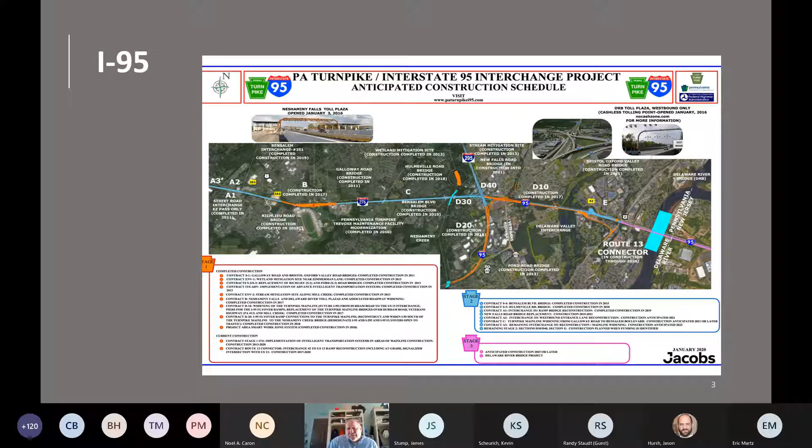So that was a big chunk, and the Delaware River Bridge is the next real big thing going on, at least to get started in design.

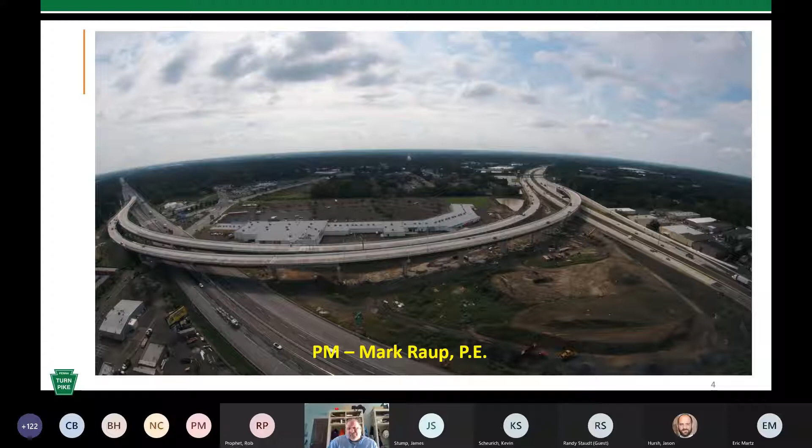The Lafayette Street interchange at milepost 331 is part of the Montgomery County Lafayette Street Improvement Project, to get from Norristown out to the Turnpike, and to help revitalize Norristown with an access point there. One of the early things that has to happen before we can build our interchange is for Montgomery County to replace the Ridge Pike Bridge over the Turnpike prior to us going to construction, to allow for ramps to fit underneath it. Our project manager for the PTC is Mohammad Mohammad, and the prime designer is KCI.

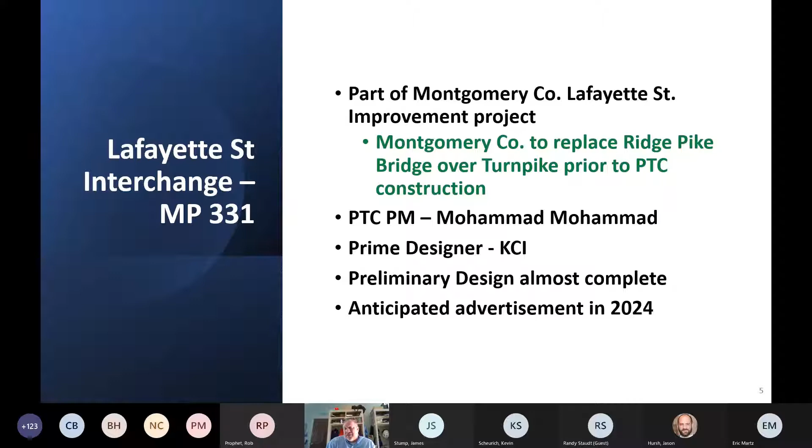The preliminary design for that project is almost complete, with an anticipated advertisement somewhere in 2024 if things go well. The Ridge Pike project actually had a public meeting last night, so they're getting moving into their final designs. Hopefully they'll be out about a year ahead of us, and we're hoping to have our public meeting later this year.

Another interchange project is Scranton Beltway, on the northeast extension up in and around Scranton, where we're going to have 2 connections to Interstate 81 off of the northeast extension. One will be the Wyoming Valley interchange at the bottom of the graphic shown, just before you get up by the airport in Scranton. The roads are parallel to the point where they're maybe 100 feet apart, and we're going to have a connection there, and then a direct connection up at the very end of the northeast extension at Clarks Summit and Interstate 81, where again the roads tie into each other.

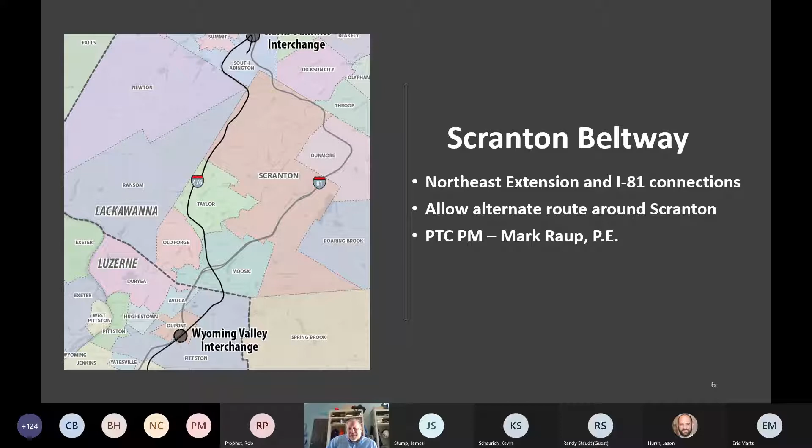There'll be a direct connection, and the hope is when there's any congestion on 81 or even on the northeast extension, there'll be a quick alternate route to go around Scranton to keep you out of the congestion. The PM for that is Mark Raup, and this is going to get picked up here in the next month or two.

Probably the bigger question is, what is a special project? These are our expansions, the big chunks: the Southern Beltway, out around Pittsburgh from the airport that's supposed to end up at the Mon-Fayette Expressway, and then the Mon-Fayette Expressway itself, which ultimately will go from Morgantown, West Virginia, up to I-376 near Monroeville. If any of you are familiar with the Pittsburgh area, it'll be right near the...

I just lost my train of thought there, sorry. It's just north of where the mall is in Monroeville, but it'll tie into the I-376 expressway up there.

So there are also other projects that don't fit neatly into other categories. The Turnpike fiber project, where we're installing fiber along the Turnpike for our use and for possible commercialization, is one of our big projects in that group.

Neil Raup, who has retired from the commission but is still in an advisory role, and Wally Weimer are heading it up through design, and Steve Dale's been involved with that as well for the commission.

Another big project is our all-electronic tolling, which is being handled by Don Steele, who I'm sure many of you know as well. It's a pretty big undertaking, especially now that we're in an all-electronic environment.

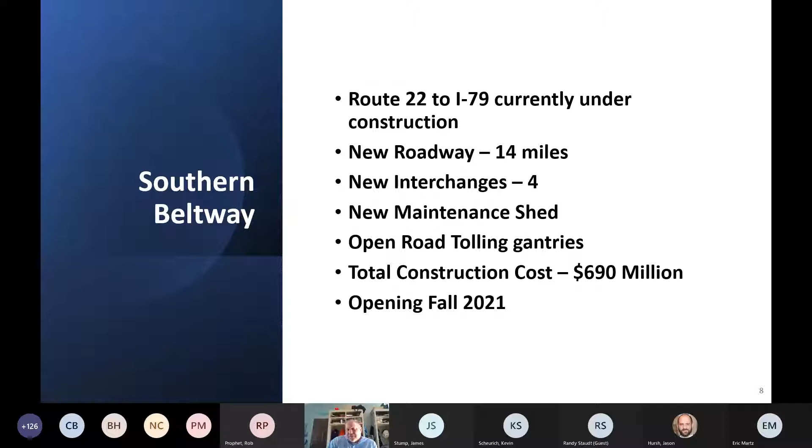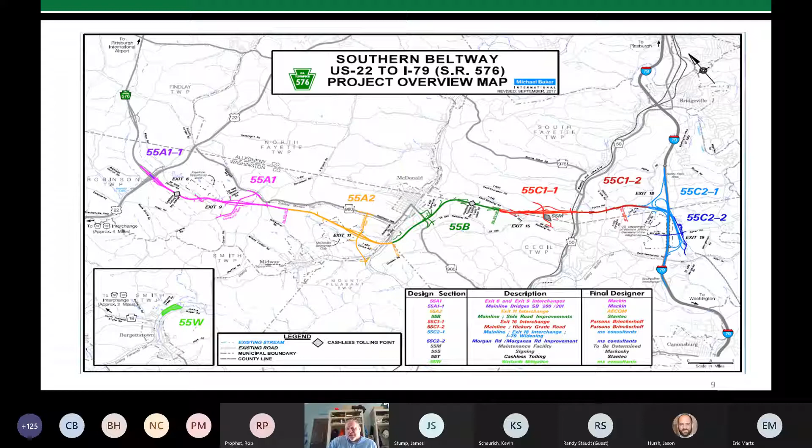This is the overview map. The Route 22 interchange is to the far left of the screen, where it says 55A1. We move along through the tolling gantries, an interchange with Beach Hollow Road, and then an interchange with Fort Cherry Connector, which is a new connector road we built. Another tolling gantry is just east of the Borough of McDonald, and then an interchange with Route 50, which entailed a connector road as well. Our maintenance shed is going to be in this vicinity too, and then the full interchange with I-79. So I'll get into the photos, which are the fun part to look at.

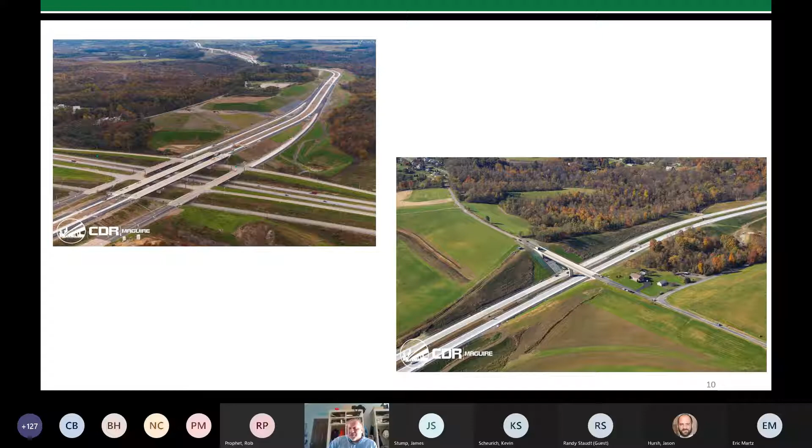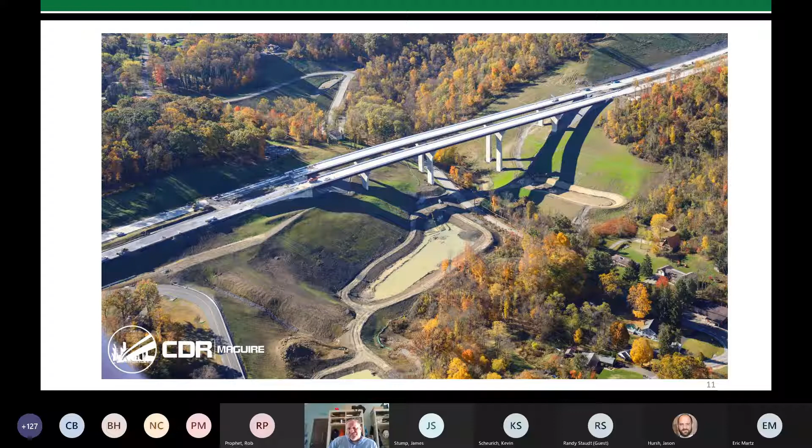The next section is 55C1-1. It's a local road where there's now a bridge over an expressway, where there was no need for a bridge before. This photo is of our bridge over Route 980, about 100 feet in the air. This is SR 980, running from the top left to bottom right. Pretty impressive structure to see from the ground, let alone from the air.

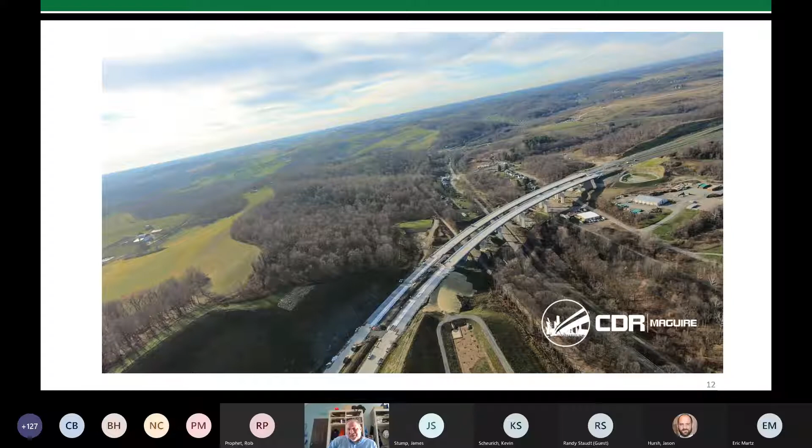The next one is our 55A1 project, with this curved girder bridge across Johns Avenue, Noblestown Road, and then two trails and a railroad. There are six sets of piers. It's a pretty impressive structure to be built and to see being built.

And then this is the interchange with Interstate 79. As you can see, the interstate runs from the bottom left towards the top right of the screen, and the Southern Beltway is to the upper left part of the screen. Coming to the right, this is where the grading is going on.

Where we go under I-79, we actually had to basically punch a hole underneath it and then construct the bridges. So we shifted traffic, excavated, built the new bridge, and moved traffic to where it is now. You see in this picture, and then finished cutting the hole through there so they could do all the fine grading for the expressway.

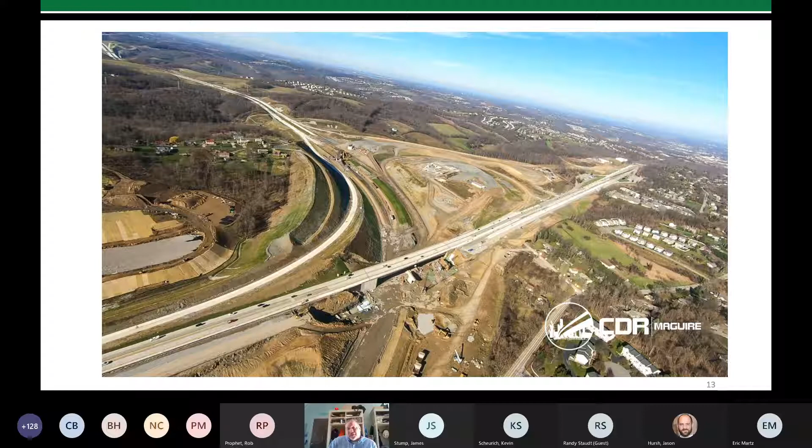The last photo is looking from the south to the north towards that same interchange. You can see where it loops around to the left-hand side of the screen, rough graded to head north on I-79, with the northbound I-79 exit coming to the left of the screen as well. In the upper right again is the bridge over I-79 that we just had a close look at. It's a pretty impressive project.

It's really something to see it come along, especially during construction.

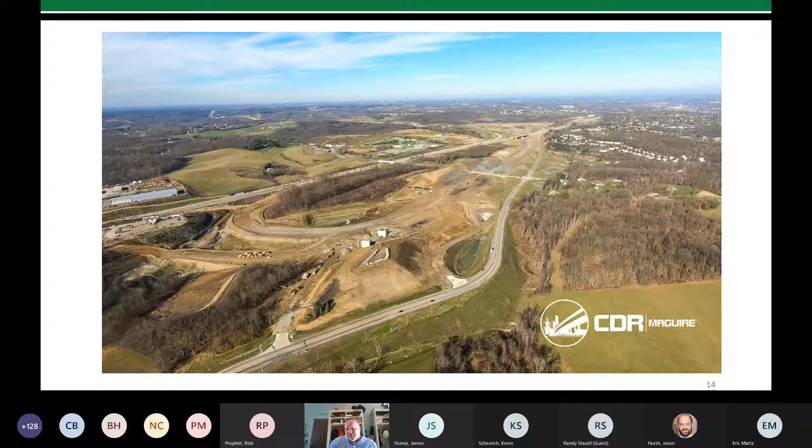The other big expansion project we have going on is the Mon-Fayette Expressway project. Currently we're in design from Route 51 to Duquesne. The Route 51 exit is in Jefferson Hills, where the expressway currently ends. The intent is to end up in Monroeville, but for now the funding gets us up through the city of Duquesne, basically to the Mon River.

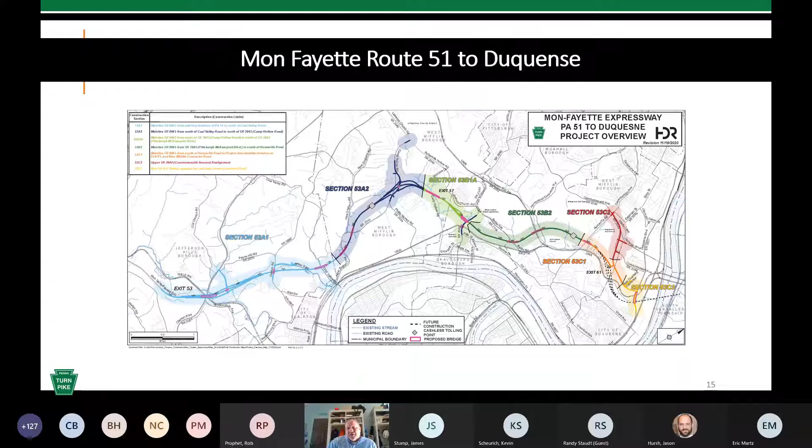The first advertisement is slated for spring of 2022. This is an 8-mile stretch of construction. We'll finish the full interchange at Route 51, build a new full interchange in Dravosburg, and a partial interchange in Duquesne. The one in Duquesne will eventually be a full interchange when the expressway gets completed to the north, but for now there's no reason to build the ramps coming from the south and to the north, because there's nowhere to go to or come from.

So the total construction cost right now is estimated at $905 million.

So these expansion projects basically come from what's called the independently funded program, rather than our capital plan. Act 61 of 1985 designated the projects that were going to be built out of this independently funded program, and the funding comes from oil franchise tax, and it funds both Mon-Fayette and Southern Beltway.

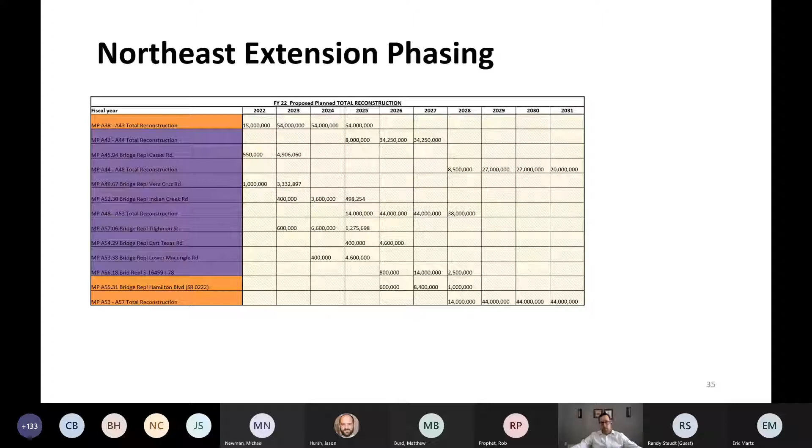The last slide I'd like to present is that we are looking to move the milepost 324 to 326 project into construction, pending that we have funding available. We're moving that and the Hawk Falls Bridge forward right now, which Jim Stump will talk about later. The idea is that we're getting really good bids right now. There's not a whole lot out in construction, and we feel like we have the ability to do one or both of those projects, and if we don't do them now, who knows when we will.

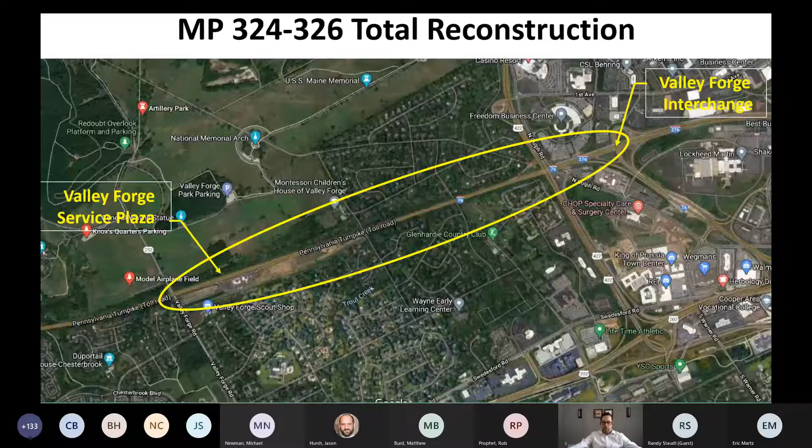So I am Charles Buchanan. I am the roadway engineering manager.

Just a quick rundown of what the roadway unit does inside engineering design. We monitor the overall system-wide pavement condition to maintain a high-quality ride surface for all the paying Turnpike customers. We're responsible for the timely development of all resurfacing programs, pavement rehab projects, routine repair, and miscellaneous highway design, anything that addresses customer safety and minimizes customer impacts, and we follow all current design standards, or ensure that other units are following them.

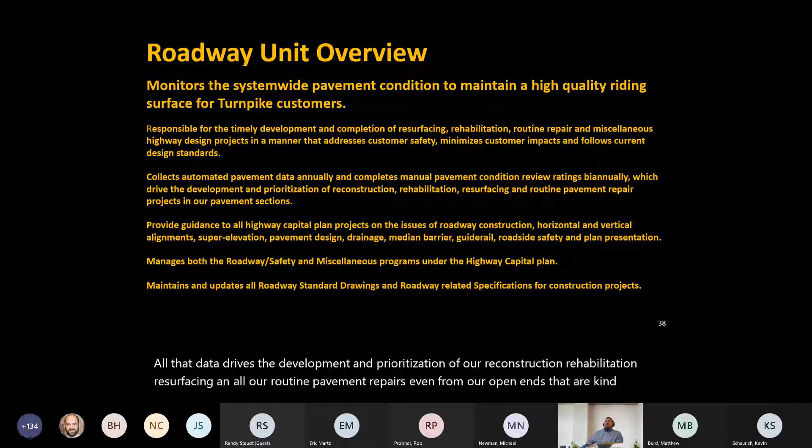We also collect automated data annually and complete pavement condition reviews on a biannual basis. My staff runs the system twice a year and does manual pavement inspections that way. All that data drives the development and prioritization of our reconstruction, rehabilitation, resurfacing, and routine pavement repairs, even from our open ends, which are tweener construction contracts between what our maintenance department can handle and what our resurfacing projects plan to do.

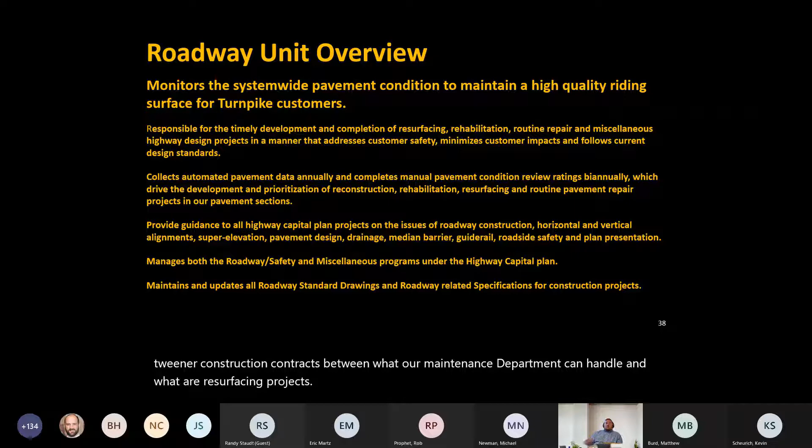We provide guidance to all the other projects on the highway capital plan concerning roadway construction, horizontal and vertical alignment, super elevation, pavement design, drainage, barrier, guide rail, and overall roadway safety.

Plan presentation is also under our purview. We manage both the roadway safety program, which covers resurfacing, barrier, and guide rail projects, and we oversee the miscellaneous program. So if something doesn't neatly fall within roadway safety, bridge, or total reconstruction, it gets lumped into what we term the miscellaneous program. That includes geotechnical, stormwater MS4, environmental monitoring, and traffic engineering.

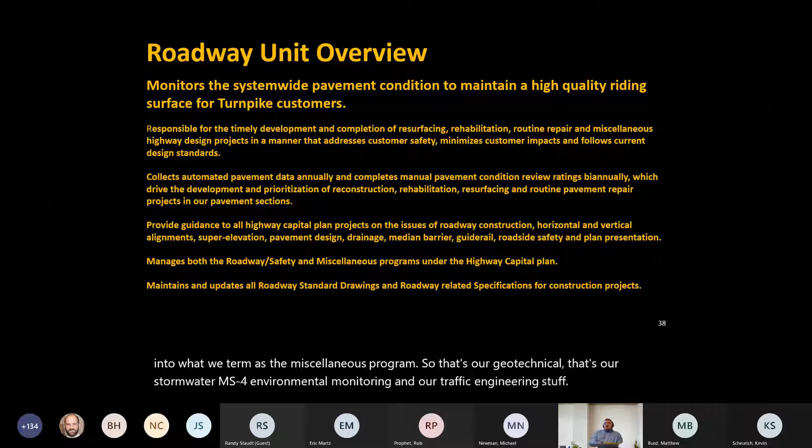Roadway also maintains and updates all the PTS 100 roadway standard drawings and all the roadway-related special provisions and specs for our projects.

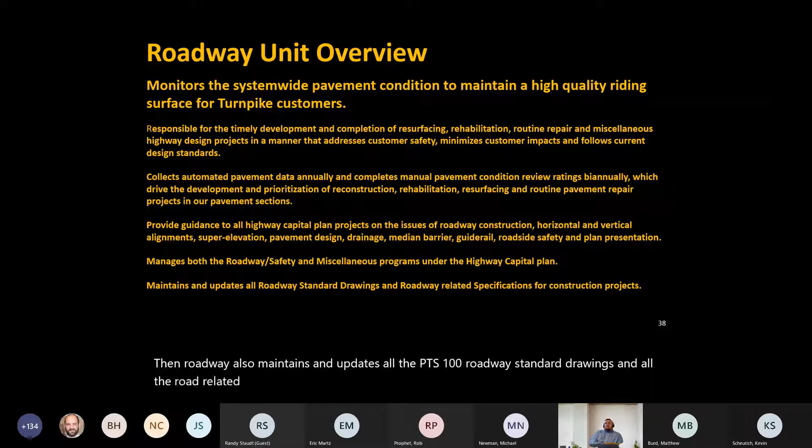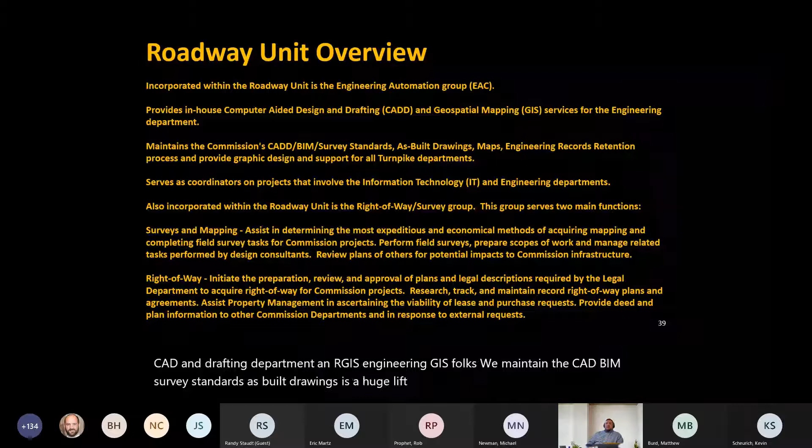Incorporated inside Roadway is also the engineering automation group, our in-house CAD and drafting department and engineering GIS folks. We maintain CAD, BIM, and survey standards - as-built drawings is a huge lift for us - all the mapping, our records retention process, and we also provide graphic design and support for other Turnpike departments. That unit also serves as the bridge between our IT department and engineering.

Recently, our right-of-way survey group was transitioned to our roadway unit. So they really have two primary functions right now: surveys and mapping. They assist in determining all the ways to acquire mapping for projects, be it aerial mapping, LiDAR mapping, mobile LiDAR, or conventional field survey.

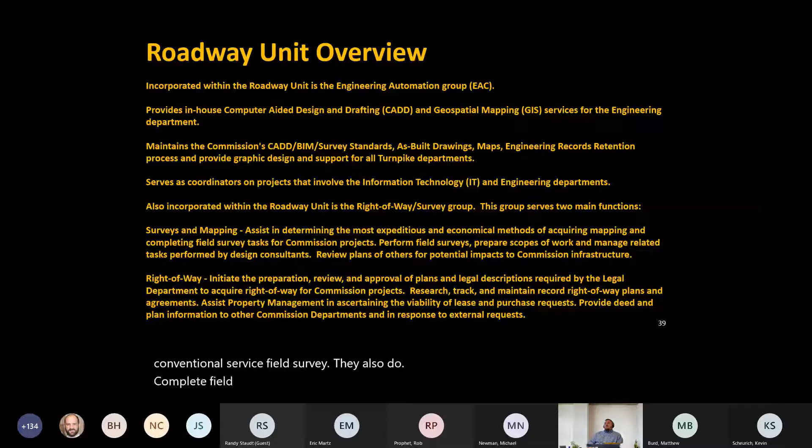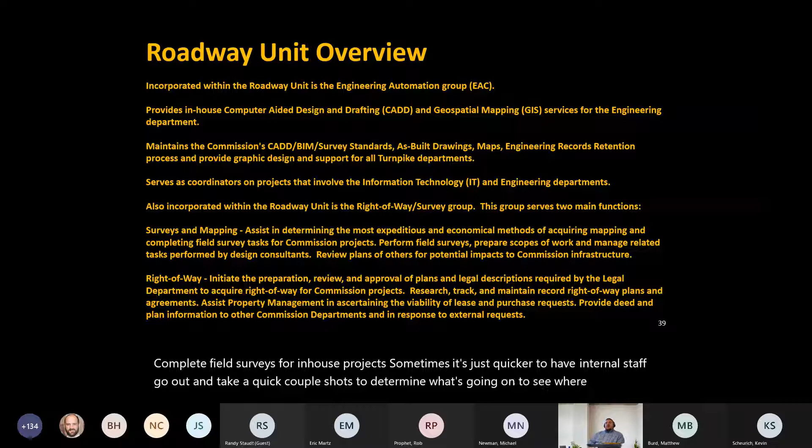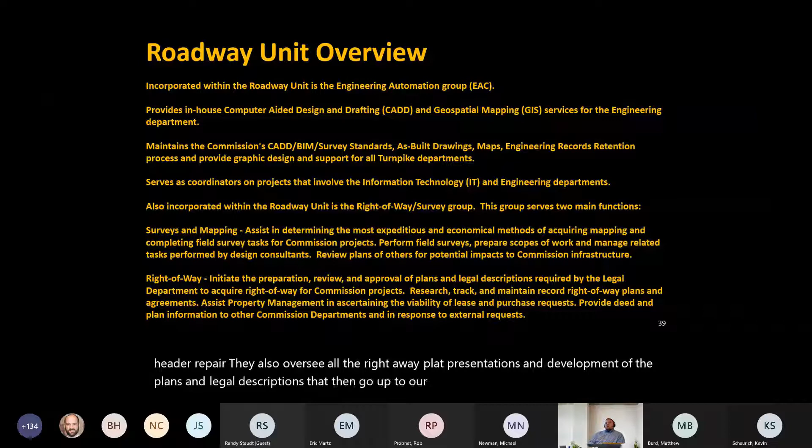They also complete field surveys for in-house projects - sometimes it's just quicker to have internal staff go out and take a couple quick shots to determine what's going on and see where we need to head a repair. They also oversee all the right-of-way plat presentations and development of the plans and legal descriptions that then go up to our legal department to actually acquire that right-of-way for our construction projects.

Probably the two big things that happened in 2020 in Roadway were two subunit reorganizations. Our roadway unit's stormwater management and MS4 program were transitioned from roadway to the environmental planning unit as a better fit, since MS4 is more of an environmental issue now than just standard stormwater management pond design that a lot of us grew up with. And right-of-way survey was transitioned into the roadway unit also.

I just wanted to cover real quick, request for commission information - this is for requesting right-of-way or as-built drawings. Usually the easiest way to get these is to go through a Right-to-Know request. On the Turnpike's main website, if you go all the way to the very bottom, there is a Right-to-Know link.

You heard a lot about funding already, but I deal with a lot of funding versus life cycle issues.

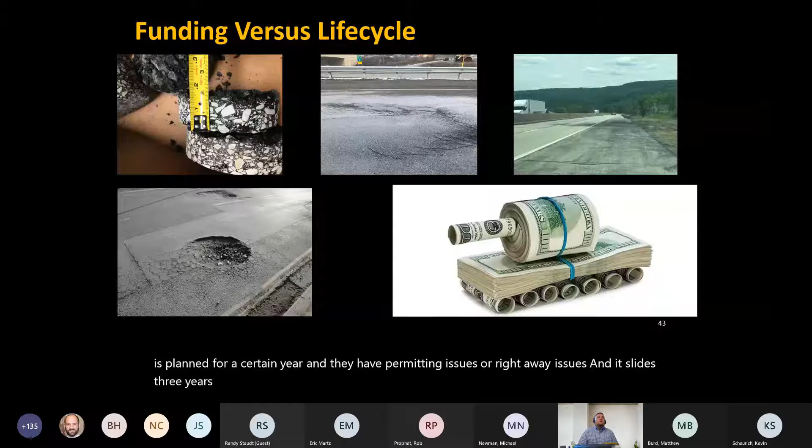Roadway is usually the one that has to flex a little more. If a reconstruction is planned for a certain year and they have permitting issues or right-of-way issues and it slides 3 years, we still got to get in there and maintain that road. So we have to be very flexible with our overall program.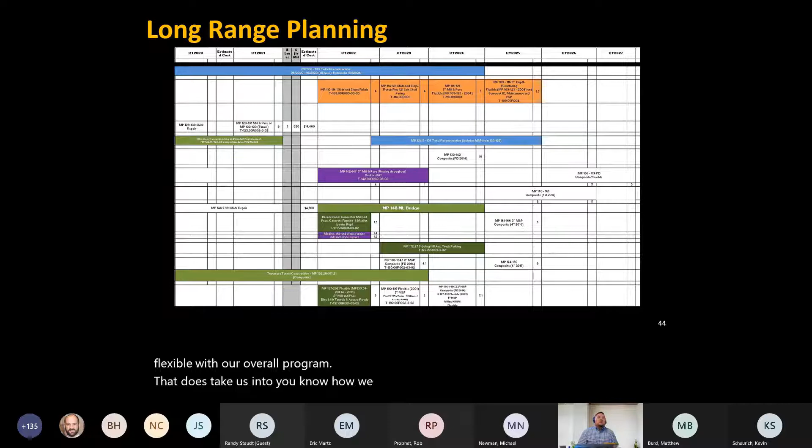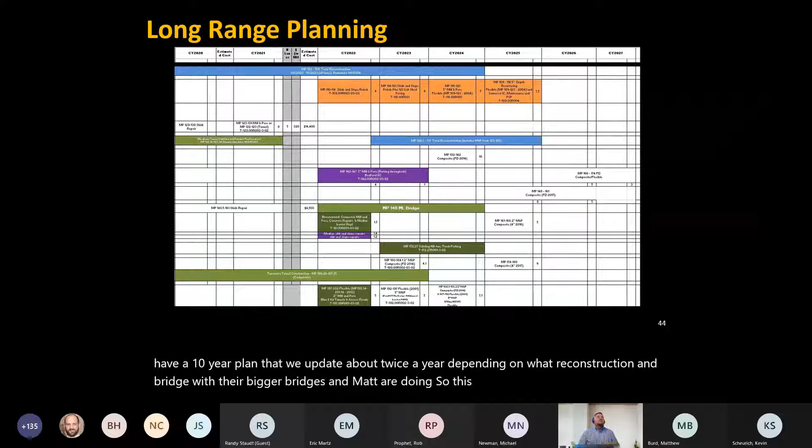That takes us into how we run our long-range planning out of roadway. We have a 10-year plan that we update about twice a year, depending on what reconstruction and bridge with their bigger bridges and Matt are doing. So this is just a snapshot of our District 2. This takes us out through 2027 on this view.

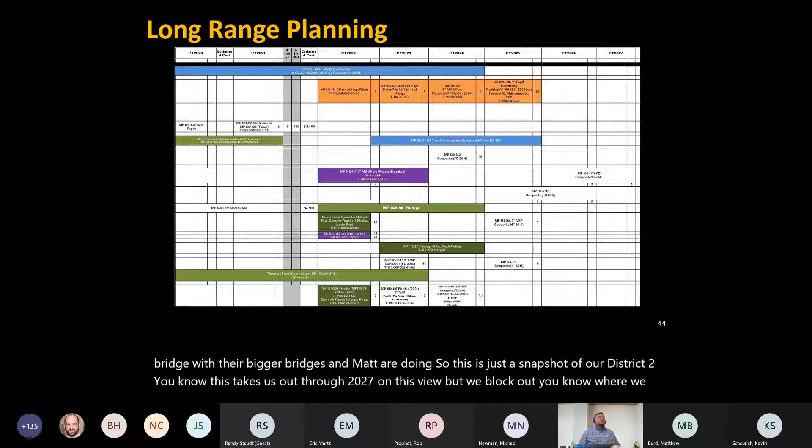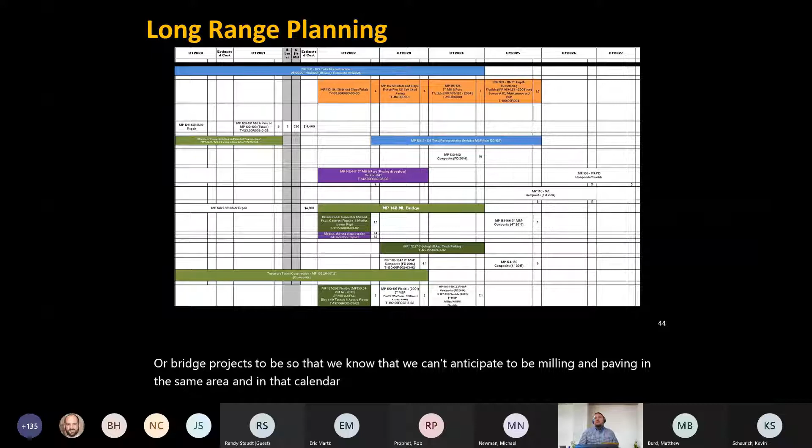But we block out where we are anticipating total reconstructions to be or bridge projects to be, so that we know we can't anticipate to be milling and paving in the same area in that calendar year. So we have to start making the decisions: do we mill and pave an area early, or do we try to patch it and push it for a year or two and come in after a project?

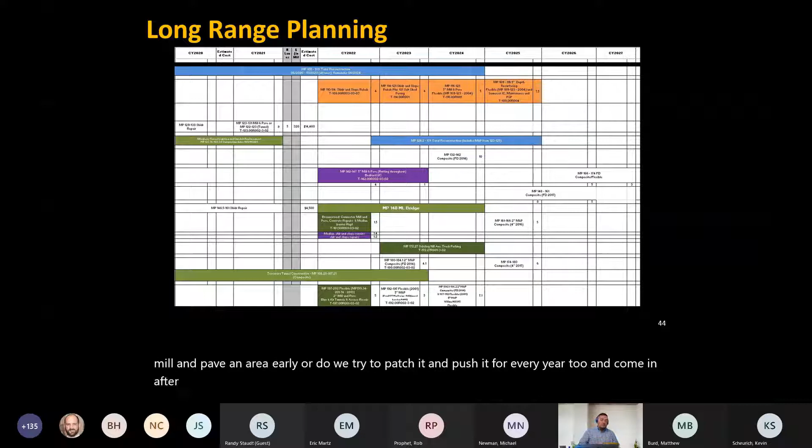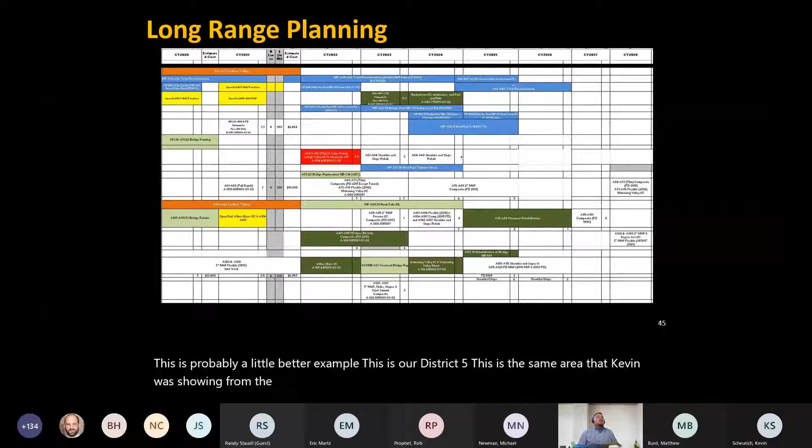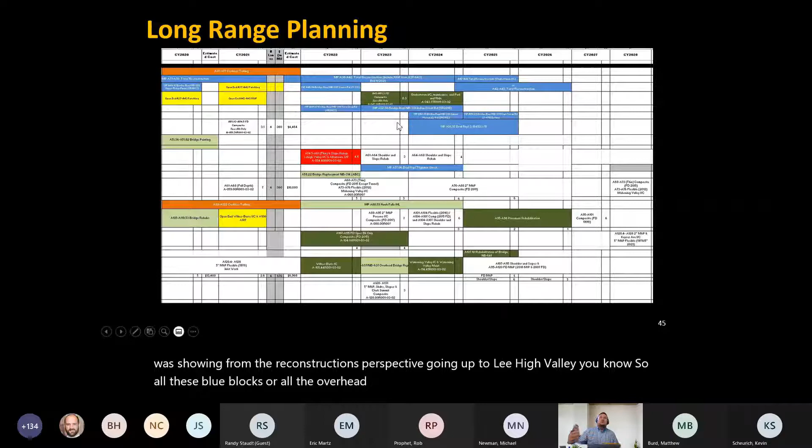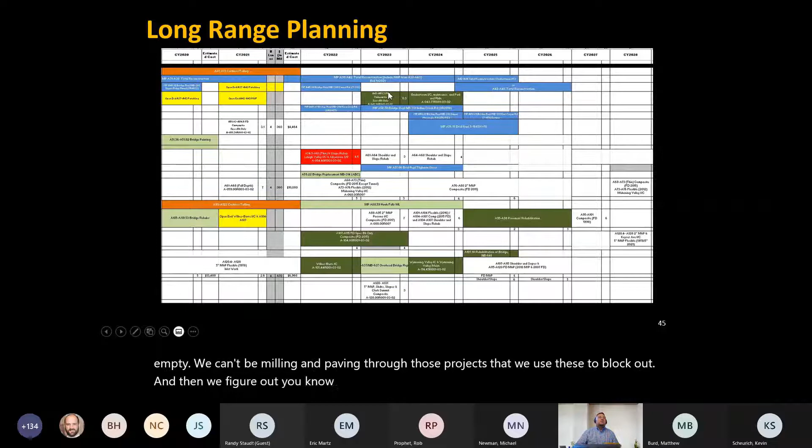This is probably a little better example. This is our District 5, the same area that Kevin was showing from the reconstructions perspective, going up to Lehigh Valley. So all these blue blocks are all the overhead bridges that, when they have mainline MPT, we can't be milling and paving through those projects. So we use these to block out, and then we figure out how we can chop up our mainline sections in order to maintain the highway for our customers.

I do want to touch base a little bit on digital delivery and where the Turnpike is heading. Right now, to date, we've created our master line and master right-of-way files. We're working on our linear referencing system, so the difference between a mile post on a plan sheet versus a mile marker that is in the field, whether they're actually at the same station or 50 feet apart, 100 feet apart, for correlation.

We're doing LiDAR scans and creating our master pavement data files for AgileAssets. We've started to develop corridor and drainage models for our digital delivery. We've started to create our BIM technology standards, and we will be in a position to roll out compliance checking in a very short amount of time. And we are researching and going through our workflow of basically the file management system.

Digital delivery between now and 2023 — we've kind of set the benchmark at 2023 to be at the point where we can issue digital delivery. We're going to continue to develop our corridor and drainage models, move into the full integration of our file management system, and develop the ways to review digital models. If we're not getting plan sheets to do a 75% review, how are we going to review plans moving forward?

All right, thank you, Charles. Appreciate that. Obviously, you can tell that they did save the best for last. And equally obviously, you can see that there's not much time left.

So I guess, Eric, whenever you want me to stop for questions, just let me know. It'll be like the Oscars, you can start to sing or something, and I'll stop talking. We don't have any time constraints, Jim, so please continue.

Great, okay. I'm Jim Stump. I am the bridge engineering manager here at the Turnpike. I've been here for almost 29 years, all in the bridge department.

Just a little bit about the bridge department. We are currently down to just 8 folks. The department is split into two divisions. One side is design, and we do standalone bridge projects, whether it's rehabs up to major replacements, or structure liaisons on projects outside our department, total reconstruction, special projects, mill and paves. We also do tunnel rehabs.

Okay, let me - oh, holy cow, hold on a second, guys. There we go, that's much better. Just some random stuff, I'll go through these quickly.

Yes, we're still working remote. The transition a year ago, hard to believe it's been a year, was seamless, surprised me. I think upper management has been pleased with how it's gone. We have many more meetings, and usually you have a dog barking or somebody looking for that unmute button - I'm guilty on both counts.

In the bridge department, back in July the Turnpike had a retirement program, and we had two folks from Bridge retire, Bernie Zielinski and Ken Slippy. Between the two of them, they had 73 years of experience, and that's just so hard to replace.

We have been relying or leaning on consultants and CMs to help bridge that gap with some of our tunnel projects, as well as the Lafayette and Southern Beltway projects.

A little bit about funding. When COVID hit and started impacting our funding or revenue, Bridge was fortunate - we did not need to put any design projects on hold. We did have a couple let dates that got pushed a little bit, but all in all we were in pretty good shape. But what we haven't done is - I normally have 5 or 6 bridges that I want to advertise in ECMS, but we've kind of paused on that temporarily.

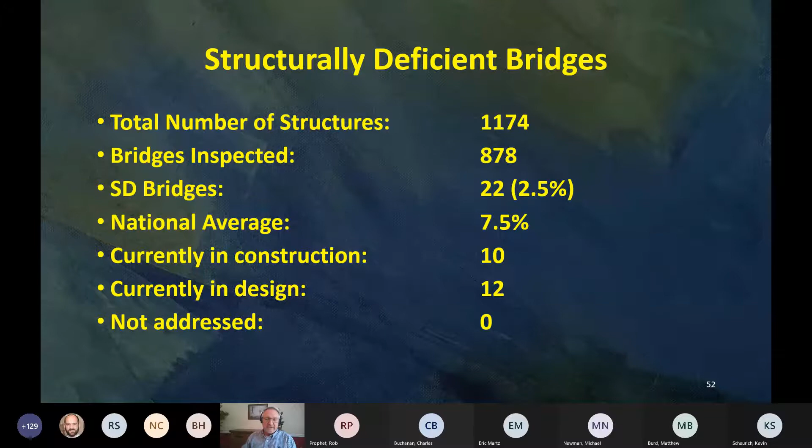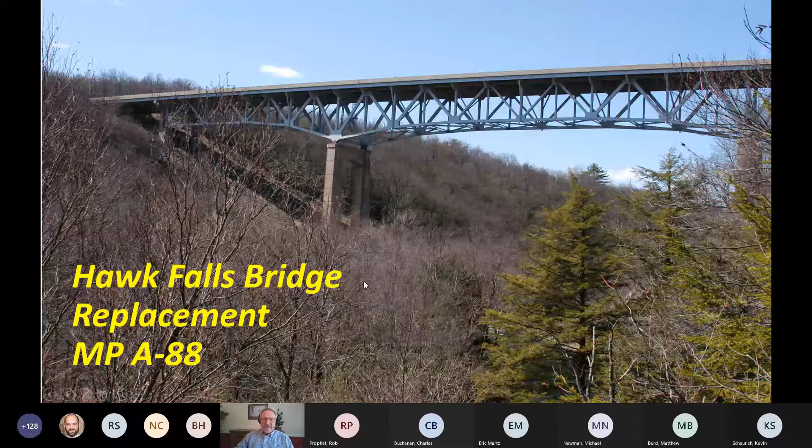All right, I'm going to talk a little bit about some of our bigger bridges. Kevin mentioned the Hawk Falls Bridge coming out here maybe. This is up in the northeast, just south of Pocono Interchange. It's one of the 2 remaining deck trusses we have on the system. And of course, this is one of the ones that we're going to try to get out early. The last item that we need to clear is getting the right-of-way from the state park below. And that really has been a process. It really has.

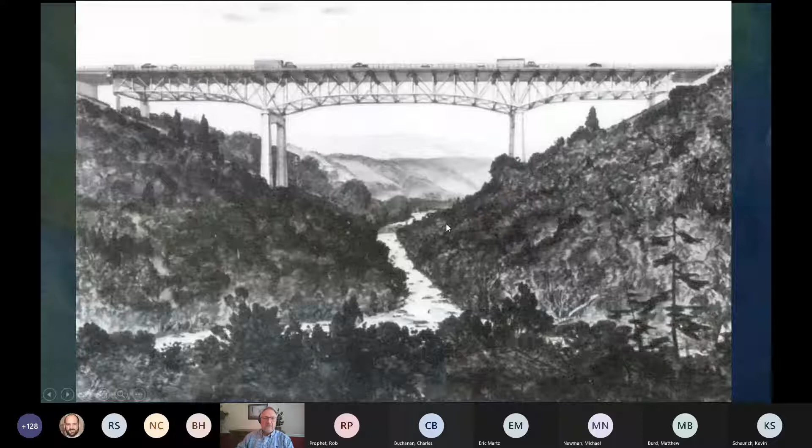Our big bridge down east, the Delaware River Bridge replacement. Matt had mentioned this earlier. This connects PA Turnpike to New Jersey Turnpike. It's jointly owned by both turnpikes. Pennsylvania is on this side, New Jersey on this side, and the limit of responsibility is right down the middle of the main span. This now carries I-95 across it, and this was the bridge that broke 4 years ago. Span 16 back here is where the fracture occurred.

This bridge is part of the I-95 corridor enhancements, and both agencies have agreed to start to get this into design. So it is currently out for advertising for study, preliminary design, 20%. As you can see here, SOIs are due March 4th. And we really need to nail down an alignment. Are we going off alignment? Or are we staying on alignment?

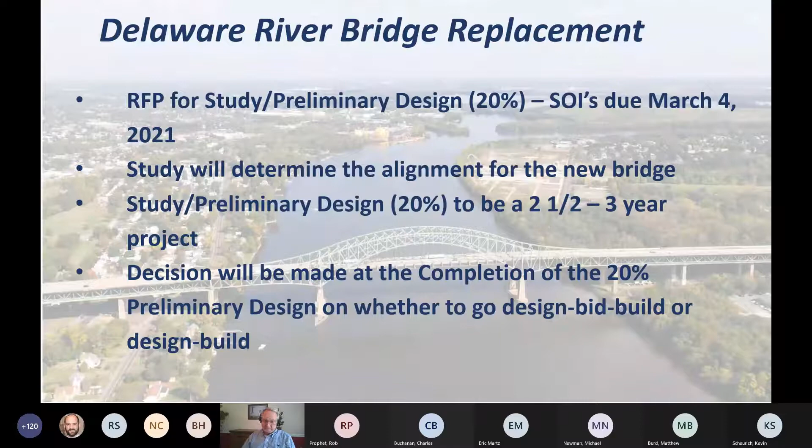Lastly, the last major bridge out west, almost at the Ohio state line, Beaver River Bridge. This is the last of our deck trusses that we have. The new bridge will be just to the north of the existing bridge, and we will be reconfiguring the Beaver Valley Interchange back in the back.

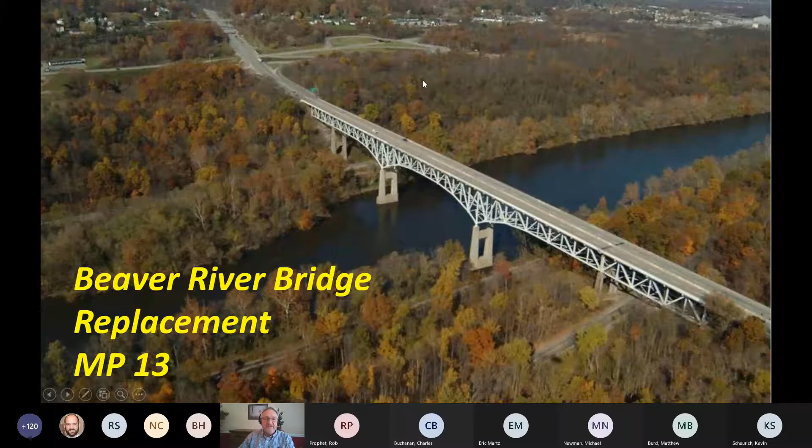Proposed structure, it's a cast in place segmental. We have most things cleared out, but we're going through the environmental permitting process. And again, boy, that's a process, that's for sure.

So let me switch over to tunnels a little bit. It's been a long process, but we finally are directing funding to the tunnels, tunnel rehabs. So we have Tuscarora Tunnel that's in construction right now. I'm just going to show you a couple construction photos, hit some high points. There's so much involved with these tunnel rehabs, I could talk for hours.

But first, I'm going to ask you guys, give you a quiz. The blue panels that you see above the tubes, what is the purpose of those blue panels? They're not for ventilation, they're not for access. I will give you the answer a little bit later.

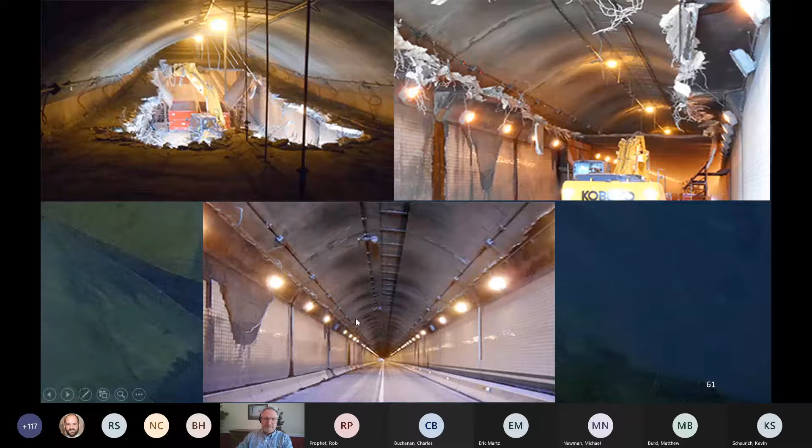Now that we've got our first tunnel into construction, we want to keep going with the rest of the tunnels. Blue Kit tunnels are in design, and we hope to get this bid once the Tuscarora Tunnel is done. Then the Lehigh Tunnel up in the northeast will be next, and we should be putting that out for advertisement in a year or two.

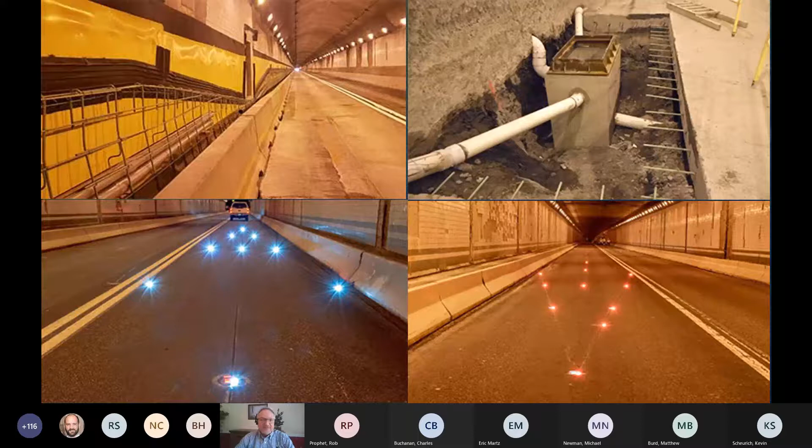Speaking of Lehigh Tunnel, at Lehigh and Allegheny tunnels we have recently completed a lighting replacement. This project included replacing all the conduits, supports, hangers, and so forth. Everything is stainless steel, and the lights are LED.

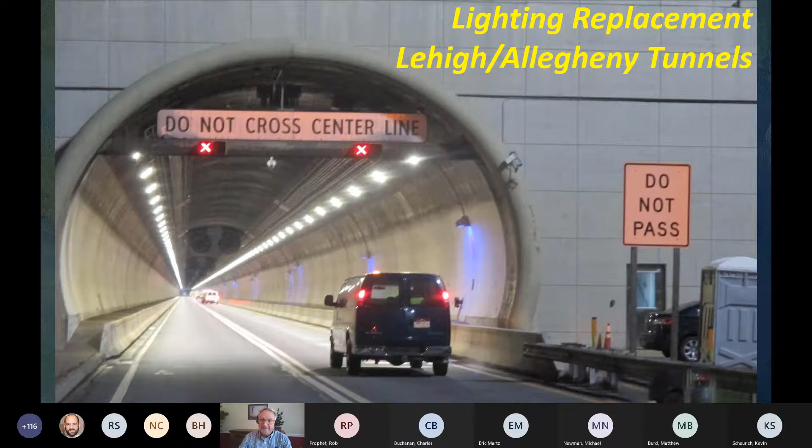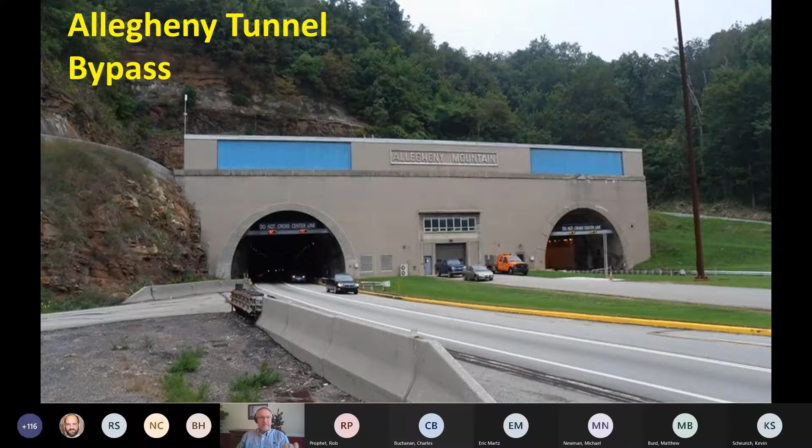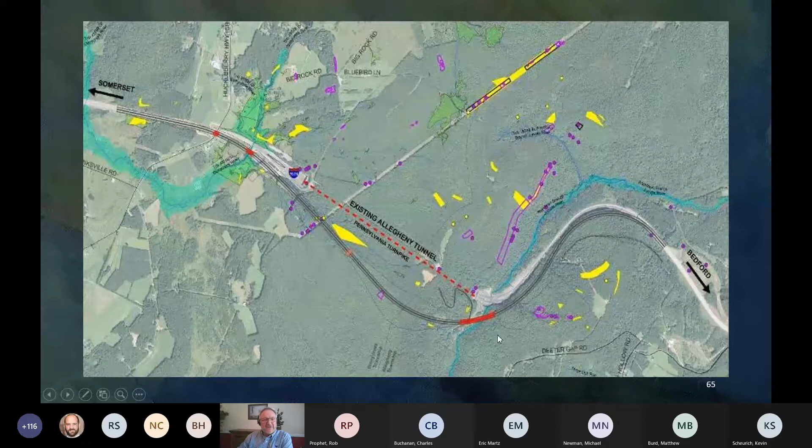Last tunnel, but not least, is the Allegheny Tunnel bypass. This shows the existing alignment, and the selected alignment goes to the south or to the west. This shows where we're at right now—we're working through the environmental documents. We're hoping to advertise for final design later this summer of 2021, and then start final design spring of 2022.

To give you the answer to the quiz: when the original tunnels were built as a single tube, we put the name of the tunnel above the tube with backlighting, so there was a hole in the tunnel facade. When we added the second tube, they decided to put panels on the existing side and do the same thing on the new side. So that's the purpose of those blue panels, just to fill in the holes. So when you're driving through the tunnels with your friends and family, you can impress them with that knowledge.

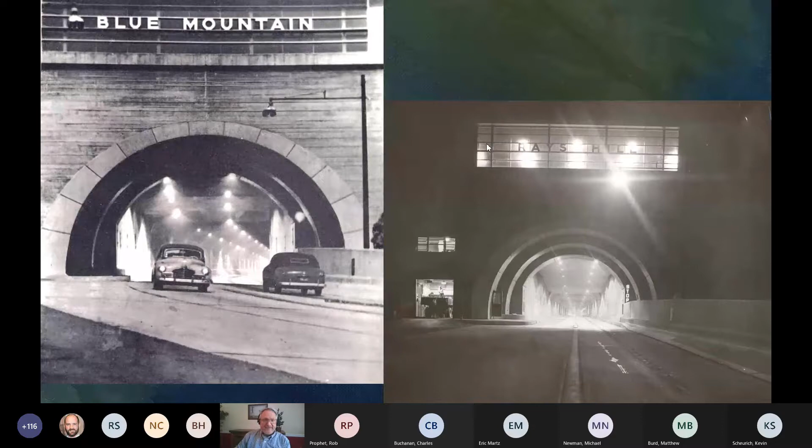So with that, Eric, I am done, and I'll turn it back to you, sir.